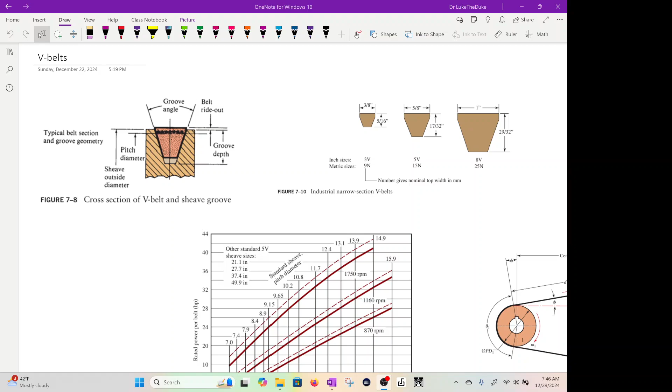All right, so here are V-belts. Basically they have a kind of groove angle, okay? They kind of look like a V, and depending on, like, you have 3V, 5V, 8V, it depends on the size of this belt, okay? So this is what they would look like, the cross-sectional area, and they're commonly used, and you're going to be able to do an example on how to size one, okay?

So let me go right here first. Here's that schematic, right, that I showed you in the previous video. And they've actually simplified and derived equations.

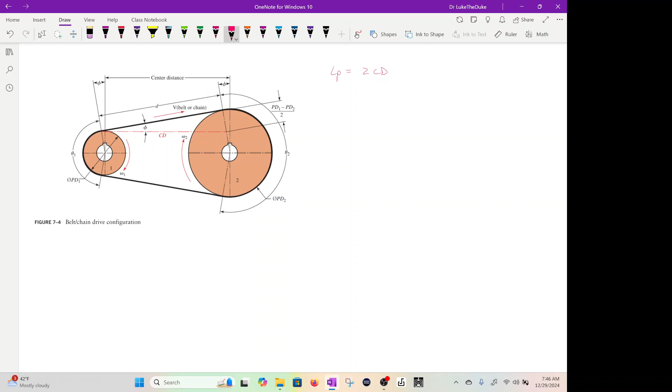So for a V-belt, the length of the belt is 2 times the center distance plus 1.57 times D2 plus D1, okay, plus D2 minus D1 squared over 4 times the center distance.

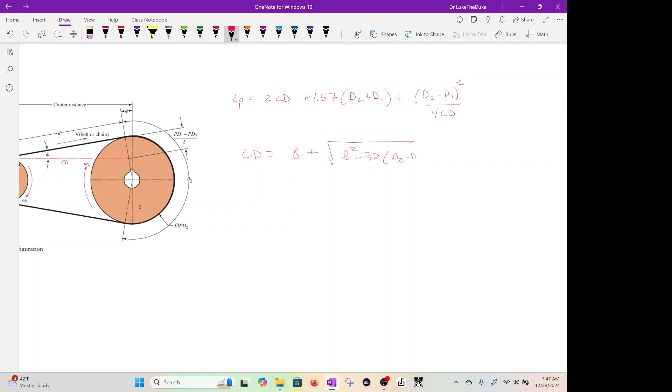Center distance is equal to B plus square root of B squared minus 32 times D2 minus D1 squared all over 16, where B equals 4 times LP minus 6.28 times D2 plus D1.

Theta 1 is 180 degrees minus 2 sine inverse of D2 minus D1 over 2 times center distance. Theta 2 is 180 degrees plus 2 sine inverse of D2 minus D1 over 2 times center distance. And then D becomes square root of CD squared minus D2 minus D1 over 2 squared.

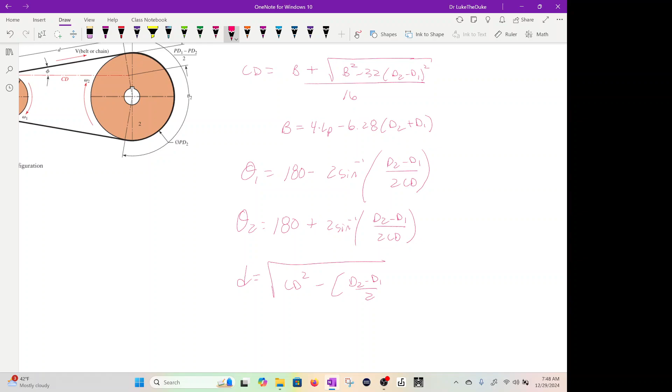Now, I'm not going to show you how those were derived, but these are the fundamental equations you can use to figure out and size a V-belt.

Let me fix this over here. Right, so those equations we're going to use. We're also going to use some charts.

So here is figure 7.15, and this is for a V-belt, a 5V V-belt. So what we have here is the small sheave pitch diameter, and then you have rated power. So each belt size, depending on the pitch diameter, will have a rated power. And this rated power, these lines here, are for when you have a perfect 180 degree contact angle.

Now sometimes you won't, depending on the exact sizes that you can buy of these sheaves. Sometimes you get one that isn't going to make it 180 degrees, and I'll show you those corrections.

But here you have RPM: 1750, 1160, 870. The solid line is when you have a velocity ratio of 1. So you can find those, remember, by the omegas or your pitch diameters. The dotted line is when you have a velocity ratio of 3.38.

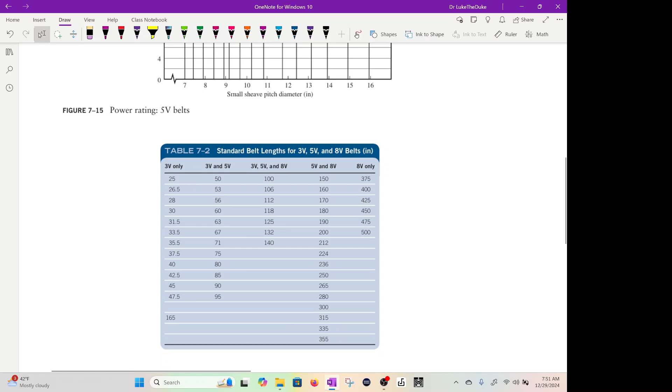Down here, this is standard belt lengths. You'll find that LP might be, say, 162. Well, they don't make that, so you either go 160 or 170. All right, so that's table 7.2.

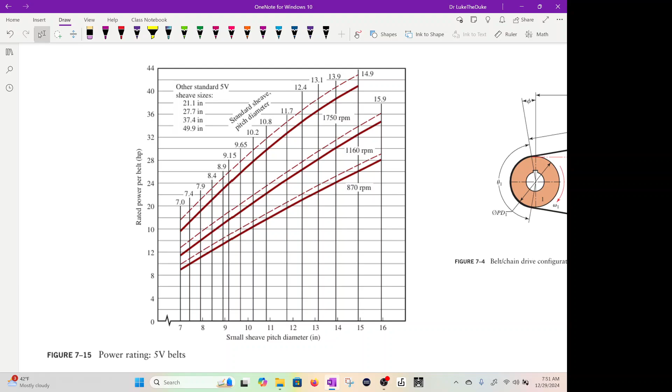Because we use 180 degrees, that gives you the best contact, and anything more or less, you may have more contact or less contact, so you're going to reduce your power if you have less angle of wrap—less grip means less power. Depending on the length, sometimes if it's too long you might have a little more power, but if it's too short it may be dragging on things and causing more friction.

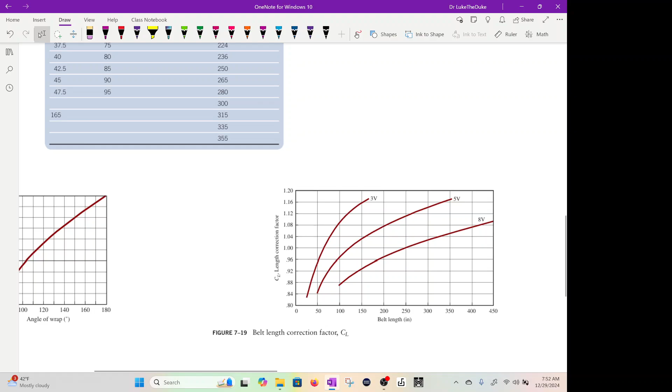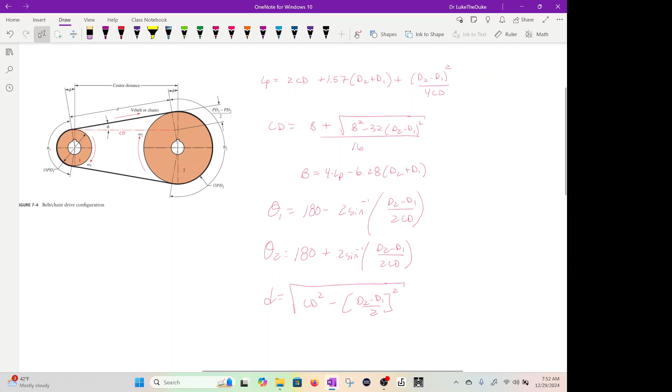So this is just a quick example, or idea, of a V-belt and the equations we're going to use in the next video to calculate how we do this. All right, thank you.